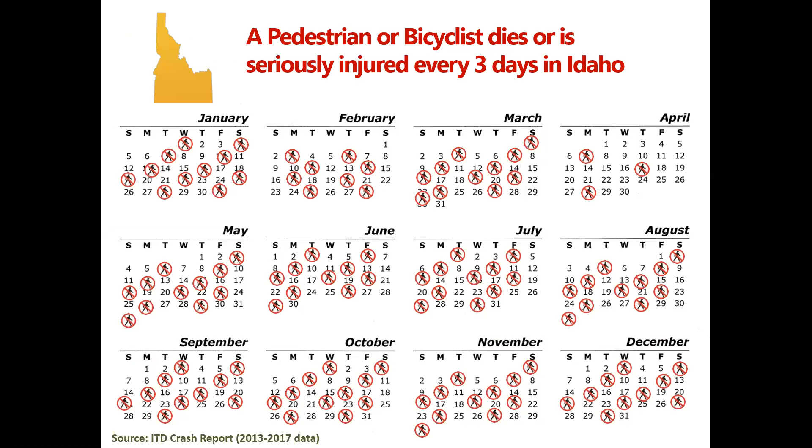So we have to really rethink what we're doing. In Idaho, this is seen in our crash data, where a pedestrian or bicyclist is seriously injured or killed every 3 days. And this number is going the wrong way—this used to be every 5 days. So we're starting to see a lot of issues with this.

The public operation of that vehicle is a privilege. The public operation of those kids is a right. Our roads and traffic signals undergo very detailed design elements and signal timing for the exclusive comfort of that vehicle. Yet many of our roads are purposely designed to limit the freedom of mobility of those children.

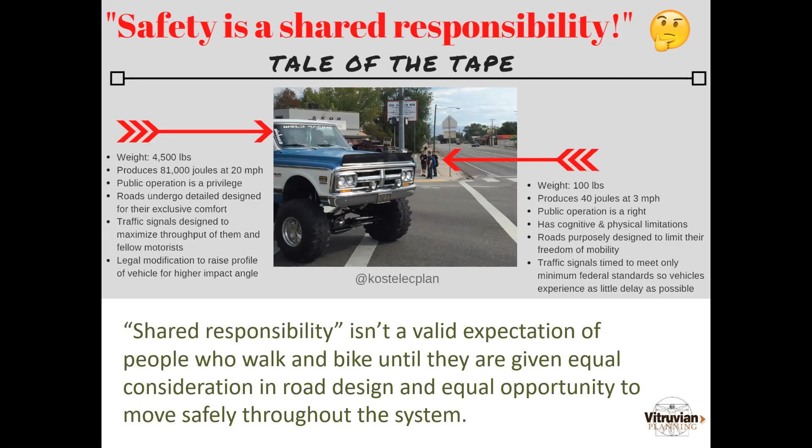So when I hear shared responsibility, I say that's not a valid expectation of people who walk and bike until they are given equal consideration in road design and equal opportunity to move safely throughout the system. That's when we can share it.

We often hear things like 'make eye contact.' If you've ever tried to actually do that with the A-pillars on a vehicle, with the tinting, with window glare, and then vehicles of this size, you'll realize that's not a fair expectation to give a child at an unmarked, unsignalized crossing where they might be walking to school. Speed is also an issue—we've seen traffic deaths go up during COVID because essentially it's revealed how our roads are designed to induce speed.

And we start talking about the limitations on a human body, especially a child. The research is really telling us that that 10-mile-an-hour difference is really 7 times more likely to kill a child. So this is why these components are important, and that's what we're going to give you today.

But I think we need to first bust some myths that I've seen over my career that limit our ability to put engineering countermeasures into the system. And I'm going to bust those shortly. I do a whole hour-long presentation called Everything Your Traffic Safety Office Told You Is Wrong to help bust down these things so we can make streets safer.

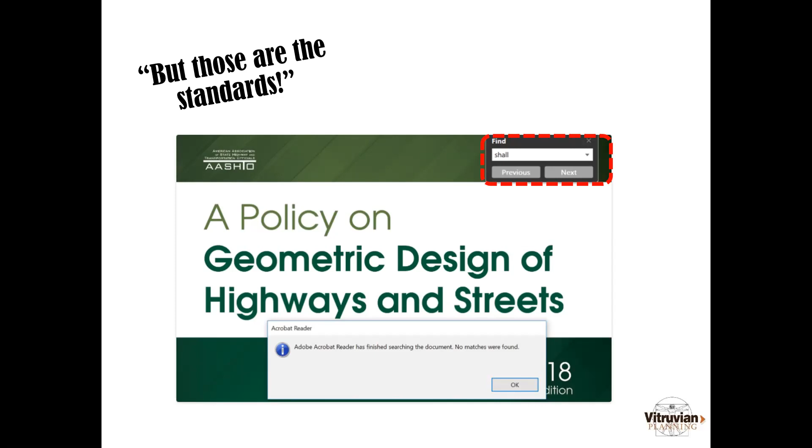Oftentimes, it's our cities, our highway districts, or our state DOTs that adopt standards. The Green Book itself has a lot of flexibility in it that should be incorporated into our local standards if we go back and revisit them. AASHTO even publishes its own flexibility guide to say how flexible they are in the design.

The Green Book is not intended and never was intended to be used solely as the standard upon which to base the design of every highway, and there's sufficient flexibility permitted to encourage independent designs.

But they also say in this book, and the case law backs it up, a standard doesn't make something safe. A standard will generally shield you from liability. However, deviating even from a local standard, like Idaho standards for public works construction, needs to be documented. And agencies don't get in trouble legally for not following a standard. They get in trouble legally when it's not followed and they don't document the reasons why.

And so if you have a licensed engineer and they have that license, the judgment and the project tracking is generally seen as more important because they realize not a single document or book can account for every situation in which we're trying to make decisions.

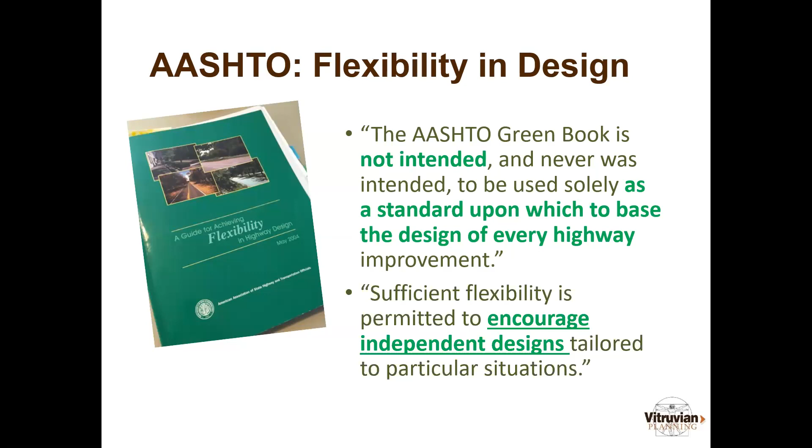The other manual out there, the Manual on Uniform Traffic Control Devices, in some contrast to AASHTO, does have things that say shall and does have standards, but they even say up front that the MUTCD should not be considered a substitute for engineering judgment. And again, it's about a specific situation.

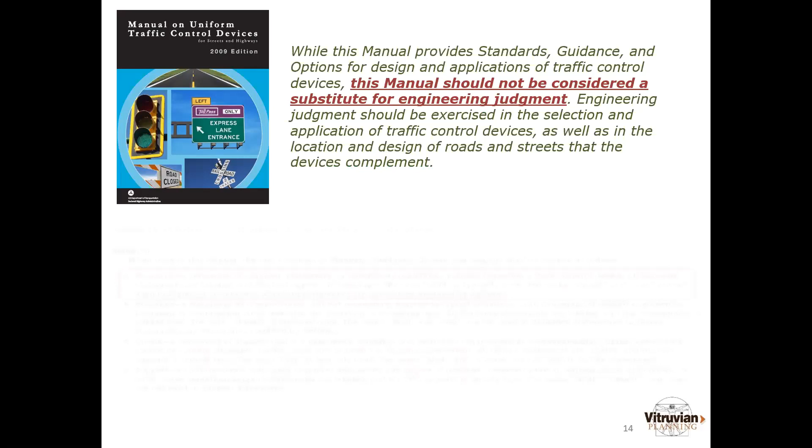If you go deep into that document, which is about another 1,000 pages, and they're updating it this year, there's a breakdown. Things that are standards will use the word shall and will be put in bold text. And chapter 7 of this covers school zones, and there are other pedestrian and bicyclist elements. Much of this document is actually something other than a standard.

A vast majority of the content are these guidance options and support. So if you were to thumb through MUTCD and hear somebody always call it a standard, very few, maybe 20% of the things in there are a standard. The other piece with MUTCD to understand is it oftentimes doesn't require something to happen. It means if you make the decision to install a sign, a pavement marking, a traffic control device, you then have to comply with the book.

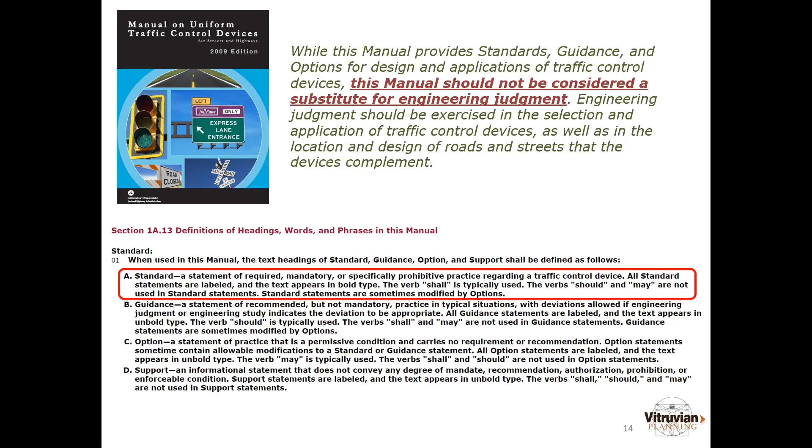Level of service must be preserved. We can't allow the kids to cross, that'll delay vehicles, and that's against federal policy. Not true. Level of service for motorists is 100% a comfort measure, it is not a safety measure. This has been stated and validated by the Federal Highway Administration, but it gets interpreted as this sacred doctrine too many times. Cars have to go fast, that's what the policy says.

AASHTO says failure to achieve a level of service indicated in the Green Book does not constitute a non-standard design decision, and FHWA has clarified it's not a mandate. The funny part about it is the moment we realize it's not required, we can then also realize that Federal Highway Administration has published guidance on level of service for pedestrians. And many of our traffic highway capacity manual softwares have pedestrian and bicyclist level of service modules in them, and we should be using those as a trade-off and understanding when we evaluate new developments, corridor studies, and intersections.

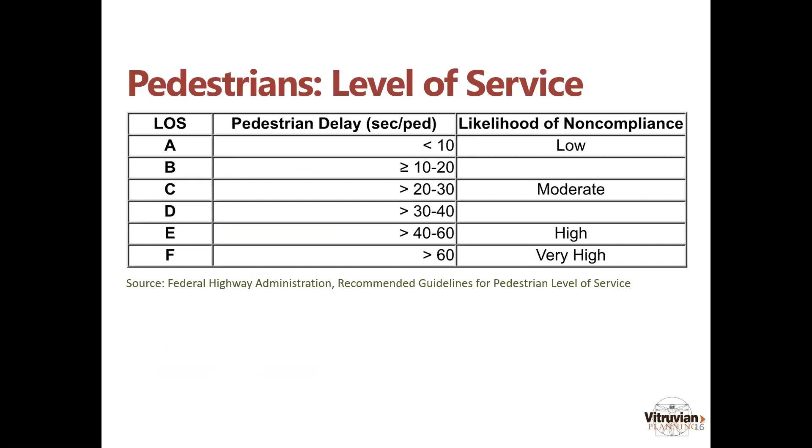What FHWA says is when a pedestrian starts to experience more than 40 seconds of delay at a signalized intersection, their likelihood of non-compliance is high or very high. That's that classic, sometimes misunderstood jaywalking. I'm going to cross against the signal if I think it's clear, if you make me wait more than 40 or 60 seconds for that. And we need to consider those things in this realm.

Lane widths are another one. If you're a local city and you have local residential streets that still have 12-foot lane widths as a requirement, you've got lane widths that are as wide as some interstate highways. And we know those kind of factors with other street design elements help prompt speed. This is a great point to show how AASHTO isn't a standard, because 12-foot lanes are not a standard unless your local agency adopts them.

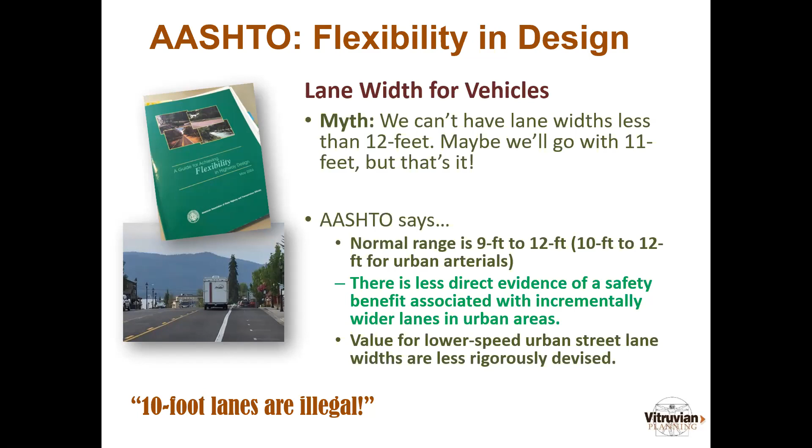The AASHTO Green Book has 9 to 12-foot lanes for local and collector streets and 10 to 12-foot lanes for urban arterials. And they explicitly say there is less direct evidence of a safety benefit associated with incrementally wider lanes in urban areas, and the values for lower speed urban street lane widths are less rigorously devised. This is because AASHTO is a national organization of state DOTs. They're looking at state highways, and I love the photo on the bottom left because that is a 10-foot travel lane in McCall, Idaho on a state highway, and it gets a lot of truck, recreational, and boat traffic there. So we do have flexibility to do these kind of things.

Last myth before we move into the treatments: 94% of crashes are caused by human error. I call this the golden calf of traffic safety, and I've heard it unfortunately used a lot over my time to deny a safety countermeasure. Well, if the pedestrians were just perfect, or if the motorists were just perfect, our standard following design practice wouldn't be a problem. Well, that's not what the data says.

This stat is oftentimes misquoted from the National Highway Traffic Safety Administration's crash causation study, where they looked at the critical pre-crash event and found that the last failure in the causal chaining of events leading up to a crash was related to driver error. But the causal chain of events represents many, many things, including the road conditions and the road design that's out there.

So moving into the main topic today, as we set that standard, I'm going to do this from a menu perspective. I'm going to give you the appetizers first, some of the basics, and then we're going to move into the entrees when we look at signals. And I've just called this one dessert, other great things you can incorporate into this environment. And if we put these things all together, we kind of get that wholesome meal that we are looking for.

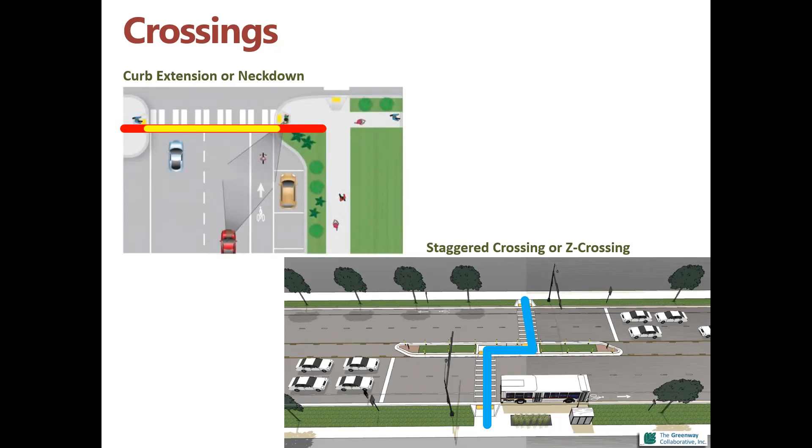The one thing I would avoid with this at signalized intersections is if we have a median, we need to not force the pedestrian to wait there for an extra two or three minutes. I can show you one on US 95 in North Idaho that is downright terrifying to stand in that median. We need to give people time to cross in one phase.

Here's some different curb extensions. I've tried to use photos from around Idaho for context, so maybe if you see a place you're familiar with, it can give you what they've experienced. Chubbuck, Idaho has retrofitted some classic 1960s-70s style roadways with these curb extensions. They help make the turning radius tighter for motorists, and have all those other benefits for pedestrians.

The other three examples also allow us to treat the drainage flows that existed prior to the curb extension. Oftentimes we'll hear that drainage issues, which are valid, can be used to basically prohibit curb extensions. But I wanted to show you that there are other options.

This 27th Street one in Boise has an added feature, and you can kind of see the tire marks on it. It's built like an apron of a roundabout, so it can be mountable for the lower percentage of truck traffic that's there, but forces the vast majority of regular vehicle traffic to take that turn a lot slower, and has some of the same benefits for pedestrians as others.

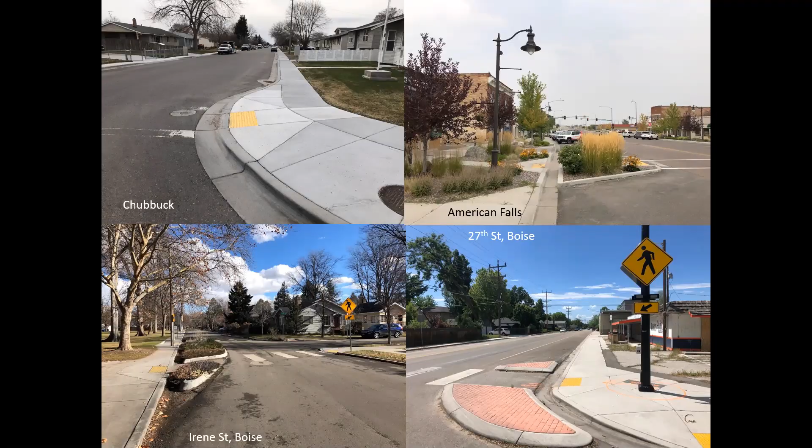Snow, we hear this a lot. Oftentimes the issues with snow plows and curb extensions don't have to do with the fact that they're a curb extension. It has to do with the design of the curb extension.

If you want some great input on this, the Public Works folks up in Ketchum and Hailey have this down to a science. Here are some treatments to deal with that. Top left is Bozeman, Montana. Bottom left is McCall, Idaho, where they put reflective tubular markers around the outer edge of the curb extension so plow drivers can see them. It's also important to avoid abrupt edges in this environment, because that's where you can get the plow clipping off and damaging the curb.

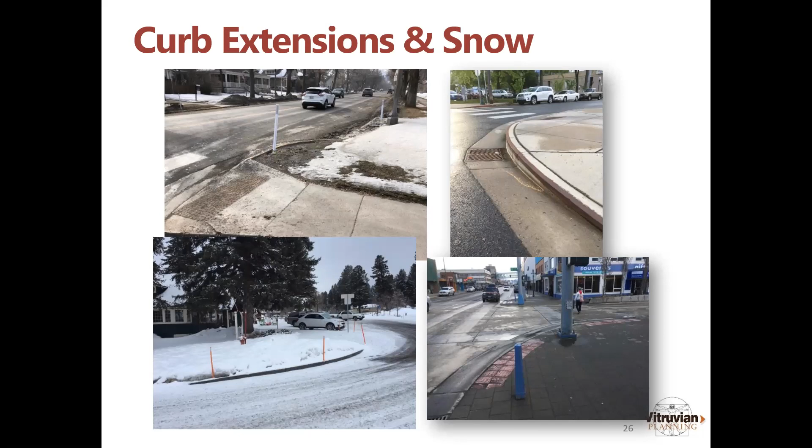Top right is Sandpoint, where they've put an L-shaped protector in cast iron on top of their curbs at curb extensions to save them from chipping. And if you want to doubt me on the snow stuff, bottom right is Anchorage, Alaska, where curb extensions are all over. What they've done there is a smoother transition, so you don't get those abrupt edges. There are techniques out there to deal with this effectively.

Pedestrian crossing islands, median islands. Top left is here in Boise, the classic Z crossing you'd see. You can see how if you cross from right to left, you're turning and facing traffic to make the next maneuver. Top right is a more traditional one at a mid-block crossing, from the Walla Walla area, giving pedestrians a refuge with the rapid flashing beacon, which I'll cover.

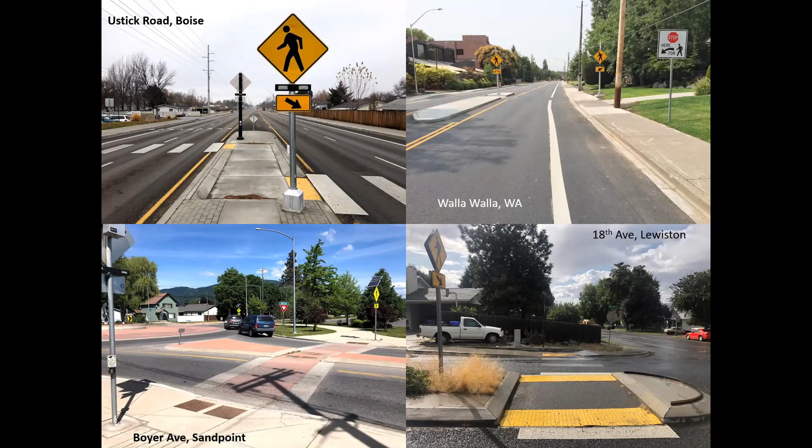The bottom left one up in Sandpoint are what you'll commonly see at a roundabout, and this one also has rapid flash beacons on the entry. Then there's the 18th Avenue project in Lewiston, which if you haven't seen it, has some neighborhood traffic circles, rapid flash beacons, and pedestrian refuge islands. It's a pretty comprehensive project, especially for a city of that size.

Moving on to treatments, this is where I'll really cover signal aspects, because this is what we get asked about a lot. It's one of the things, especially for a full traffic signal, that has limitations within what's written in MUTCD to justify the signal. So I'll start with the traditional signal, but I won't belabor it too much.

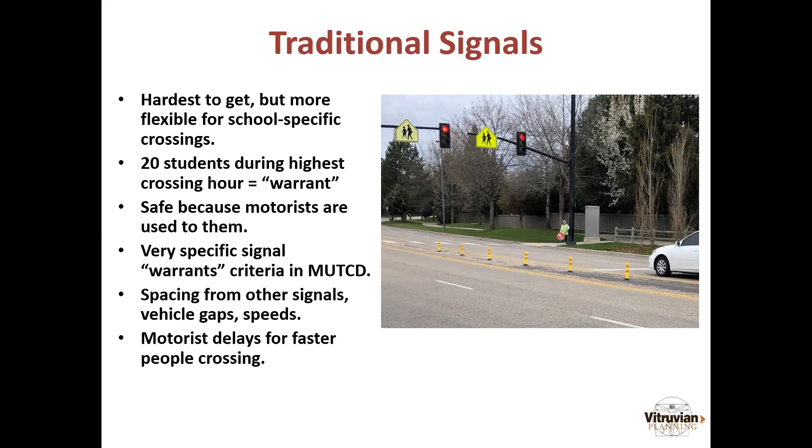Some of that is why flexibility emerged about a decade ago for other treatments, like the rectangular rapid flashing beacon. It's essentially a crosswalk accent device — you'll see flashing yellow lights when a pedestrian pushes the button, there for increased visibility or conspicuity to allow the crossing. The flashing lights are set at a frequency we've become used to seeing with emergency service vehicles, which is part of the theory behind the driver yield behavior rate of 73 to 96%. It reduces crashes, and the cost for a pair is in the $20,000 or so range.

You can get these with solar panels and other things. And obviously, if you're rebuilding curb ramps and things like that, those costs can go up quite a bit.

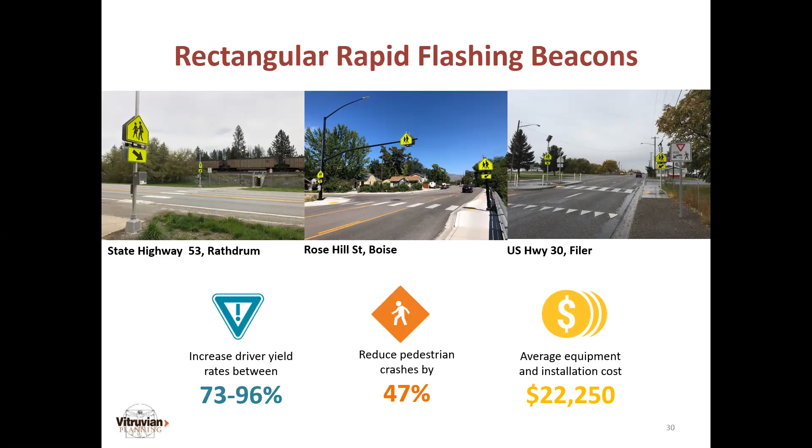The other 2 are on ITD roads, one in Rathdrum. The one in Filer is a 5-lane road connecting to their middle school that I would say is probably a borderline application for this type of treatment on a road like that, but they do have the Z crossing and other features in there. The top left is from a firm, Carmanah Traffic, which was great in buying the patent for the RRFB and releasing it for public use.

Here's just some other examples. You can see this one on Curling in Boise is used with a curb extension design that puts the medians or islands out there and reduces that crossing exposure.

This one in Moscow is great in a lot of ways. They even put a short median in there, mainly to help narrow the field of vision for motorists as they come through and really help slow that traffic down to the desirable speed in a school zone.

You can also see in this one, the width of it is 10 feet. Usually that conforms if you're doing a shared use pathway or a pathway connecting to a school - we shouldn't be defaulting to the 4 or 5 foot curb ramp for pedestrians. We should be building one that's the width of the path.

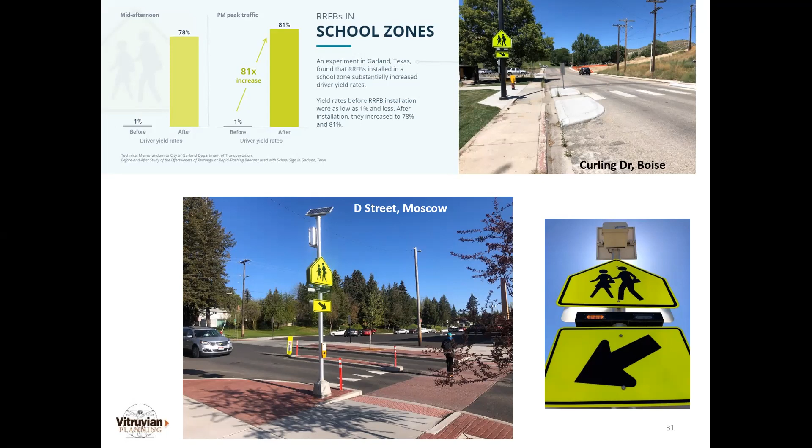When to use them: generally 3 lanes or less, put a median or a Z crossing if greater. We generally want these on lower speed facilities, 35 miles an hour or less. I would say if you're at that 35, you really need to be checking what's occurring.

The flashing time should be set to the MUTCD times for people crossing. It's 3.5 feet per second, but you can slow that down, especially for school zones or a senior center or something like that. You can't put these in at places already controlled by a stop sign or a traffic signal. That might be a request you've gotten from parents - to put this in at a 4-way stop. These are really meant for other types of uncontrolled intersections.

Some other places you see these are some of the slip lanes and on-ramps to our interstates. We have one in Boise here at a couple of right turn slip lanes at Myrtle and Broadway, as well as at Beacon and Park Center. So it's to raise that visibility.

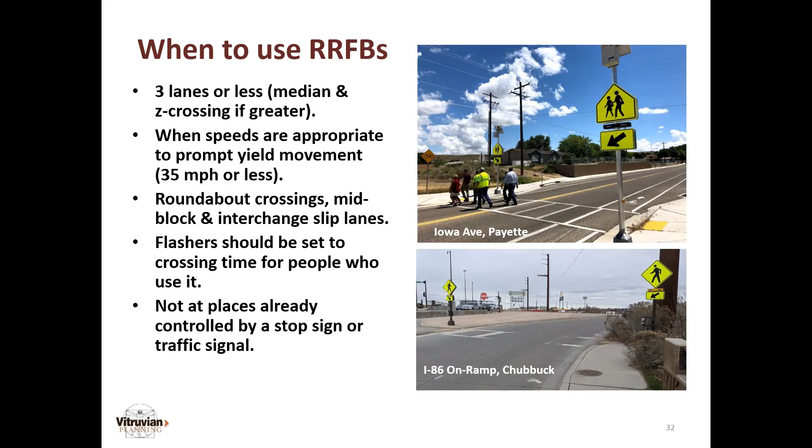Don't pay attention to the maintenance in the one in the bottom right - those are some things we really need to address from an access and usability standpoint in a lot of different ways. Don't do this. I always say if I can get a great panorama of the mountains and barely capture both rapid flash beacons, we probably shouldn't be doing this treatment alone. The signs tend to be out of the field of vision of the drivers.

This is near Preston school complexes, and asking kids to cross this is really not the greatest thing. We do have some room on the side with the shoulder to do a curb extension, and we might have room in the middle to do some type of median treatment depending on the characteristics of the turning vehicles at that intersection.

In a more urban setting, again, we shouldn't be doing this and expecting kids to cross a 5-lane road with a flashing light way off to the side, on a road that's probably designed for 50 miles an hour or so instead of whatever the posted speed might be.

This is where we really need to think about going into that next treatment, and that being a pedestrian hybrid beacon, or what I say is the artist formerly known as a HAWK signal. These are a step up in a lot of different ways.

These are the ones you've seen - if you've seen one, as I push the button for a pedestrian to cross, sometimes the signal starts flashing yellow immediately. That's a signal for motorists to start slowing down and start watching. The moment I get the walk signal is when the 2 balls or lights on top go red, and they are solid red for the walk signal duration, and they start flashing red when the countdown begins.

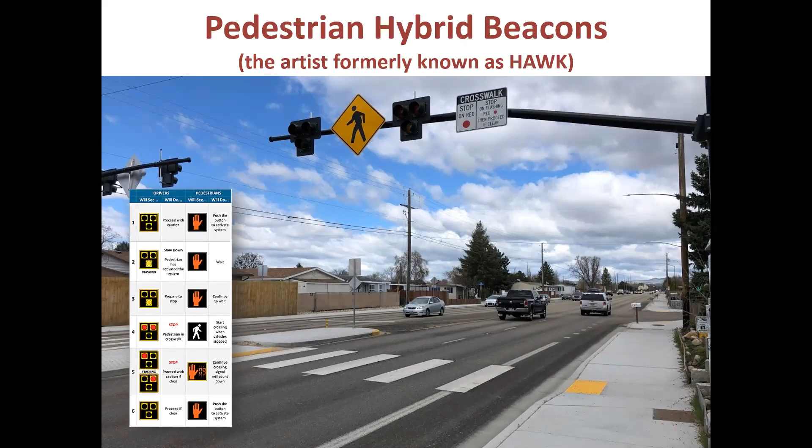I would say for this treatment, sometimes the first 1 or 2 in a community is a little bit harder because it's brand new, so it needs to come with education and outreach. But I think as we've seen here in the Boise region, where we probably have a per capita installation of these more than any other urbanized area in the country, we're starting to get to that point where the drivers are trained. Is it perfect? No, but the compliance seems to be pretty good.

And the studies flesh this out a little bit. Yield rates are high, crash rates are reduced. These, however, can come with much greater cost, and part of that is because of the signal equipment and the mast arms needed compared to the rapid flash beacon.

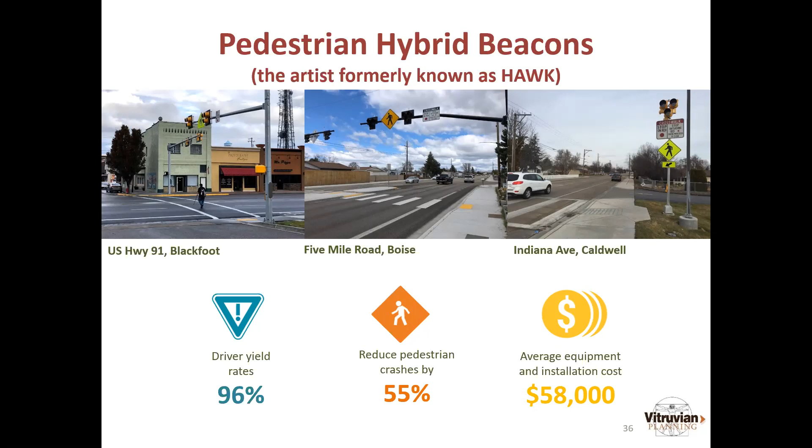Again, on this one, I would watch that flasher being outside the field of vision. In a school zone, these are generally coupled with some sort of other school zone advanced warning and speed limit reduction, and kind of our quintessential walk to school route in Idaho picture that we have going on right there.

Another example, this is the one in Blackfoot. You can see the advanced warning for the crossing, but you also see a curb extension ahead at that corner there. So these done in combination with other features just help to heighten what's going on and the issues there.

So when to use them? Generally, more lanes, more speed is where they tend to be more advantageous. One of the things MUTCD does is it allows these at a lower threshold from a pedestrian volume standpoint, and you have greater flexibility to feel like you can make that engineering judgment versus a full traffic signal.

It's best when motorists come to a complete stop. So if you're on the fence between a rapid flash beacon and one of these in a school zone, it's best to make the motorist come to a complete stop. The lowest pedestrian volume threshold here is around 20, but again, using that engineering judgment, you can look at things and just be careful with it.

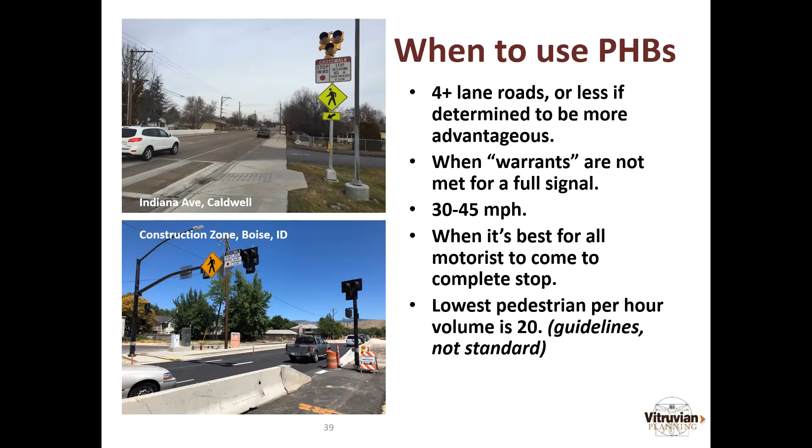The bottom left one is in a construction zone, and this was an application done to help route people around it. This was going to be a place where a hybrid beacon was going to be installed post-construction, so they got half of it in where it's supposed to be, but a pretty good tool to use when you're trying to route people around these and maybe do it in advance of an intersection.

Don't do this, and I'll give you a backstory here. This was a full signal on Cloverdale Road here in Boise that was there before the road was widened for kids to cross. And it was converted from a full signal to a pedestrian hybrid beacon, combined with the speed limit being raised from 35 to 40.

And the result is this just isn't working. The crossing guards have quit their jobs and they're busing kids from across the street that had formerly walked. So we need to be careful in transitions and thinking about these things, and hopefully a lesson learned here. I don't know that those results would have been fully expected from the beginning.

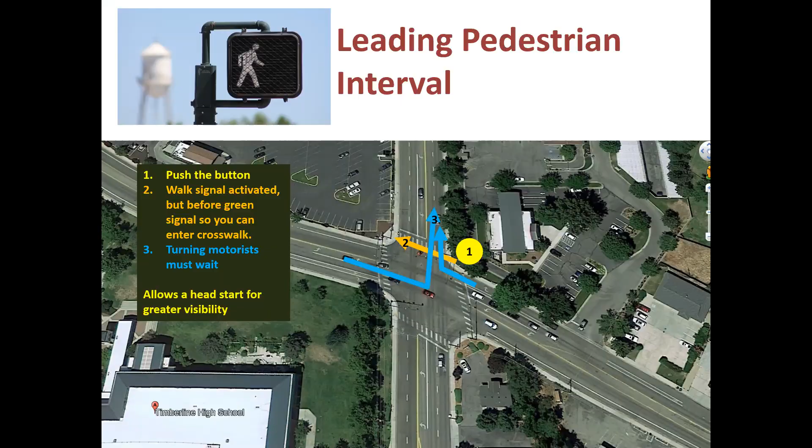Flashing yellow arrows: these are becoming more prominent and can be very problematic for pedestrians. The good part is we now have ways and methods to help preempt them when the button is pushed.

This is at Milwaukee and Northview in Boise. Prior to some recent changes, this one basically—the flashing yellow arrow setup allows us to not even give the flashing yellow phase during school walk time. So if you don't have that out there today and you have these signals, you should be doing that.

Another factor that allows this, as you can see, the red arrow is showing on this one because the push button was pushed and the walk signal is there. So in those phases where a pedestrian pushes the button, you can preempt that flashing yellow arrow phase. In some cases, maybe you only have that during a peak hour. If it's schools, you might want that to preempt it for the entire school hours and have it preempted by push buttons the rest of the day.

Other things: speed limit setting, and this is one that's getting a little more prominence. We've often heard that the 85th percentile rule is the only way to set speed limits, and the Federal Highway Administration has endorsed others. There's a lot of recognition that drivers really vote with their feet in setting speed limits. While that might be most applicable on an interstate, we're finding that the research into this doesn't apply to local streets and wasn't considering pedestrians and bicyclists. The Federal Highway Administration has endorsed the use of another tool called USLIMITS2, which is a slightly different methodology and inputs, but talks about using the 50th percentile to set speed limits when pedestrian safety is expressly a goal.

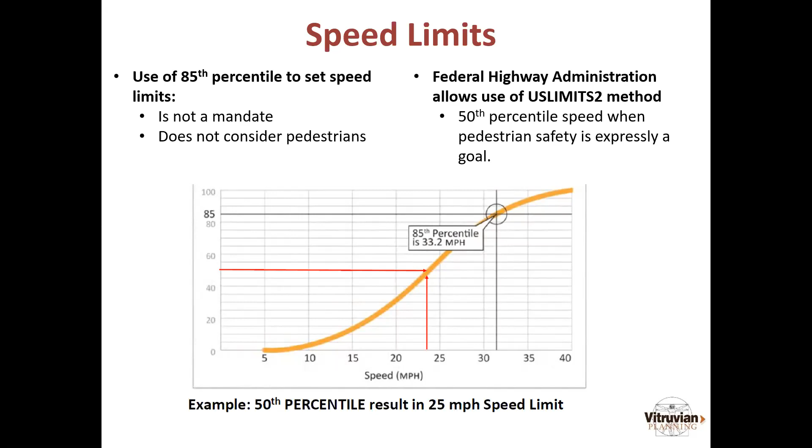So if you have school zones or activity areas where there's pedestrian activity outside of school hours—I know a couple of our high schools have activity for a 12 or 14-hour shift, not just in those arrival and departure times—you do have the flexibility to put it through this analysis and have a reasoned judgment to make that call. Why does this matter? If you've been involved in pedestrian safety, you've probably all seen the thing about speed and risk in terms of vulnerability to the human body.

The other thing that speed does is it changes the peripheral vision of the motorist. When you're going faster, your focus is much further down the road, versus when you're going slower at 20, you're looking closer. Next time you're on one of our 80-mile-an-hour interstates, think about the point down the road that you're fixated upon.

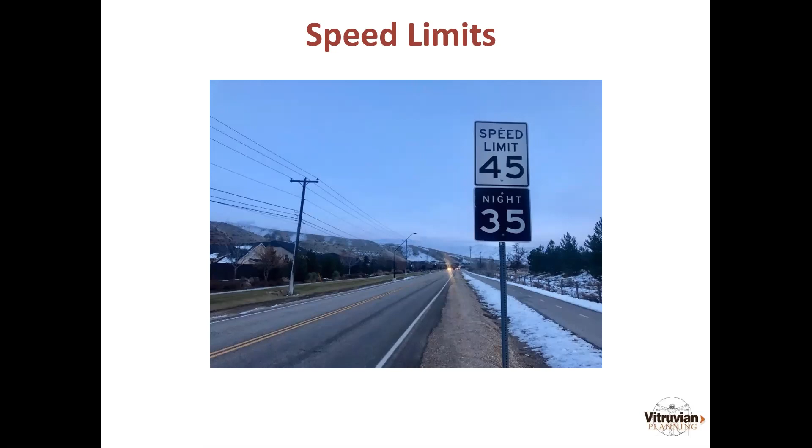The last thing on speed limits, and we'll stand for some questions, is what if we were to think about alternative speed limits? We do that a lot in school zones, but we also need to get the corresponding design expectations. What if we did nighttime speed limits in our downtown areas or areas of high pedestrian concentration? The city of Tucson, Arizona is starting to look at things like this, based on the premise, well, we reduce speed limits for wildlife. That's obviously to protect the motorist as well as the wildlife, but it's something we can probably think about doing for pedestrians. So that's kind of the quick run through of a lot of these.

The last piece I'm going to cover is this lighter, faster, cheaper approach, or what we call tactical urbanism. If you've got some of these ideas, find a way to test them out first. We don't want to build a curb extension that feels too punitive to a snowplow, but we shouldn't let that idea go away. On Sherman Avenue in Coeur d'Alene, they've put in temporary curb extensions to reduce the speed limit and test out what's going on, doing pre and post studies and looking at turning radius.

The bottom left is essentially taking yellow 4x4 posts and some movable, flexible bollards and tubular markers to create a curb extension. You can see in the background they have a fire truck and people assessing it, because they want to identify the geometry that works while still having those benefits.

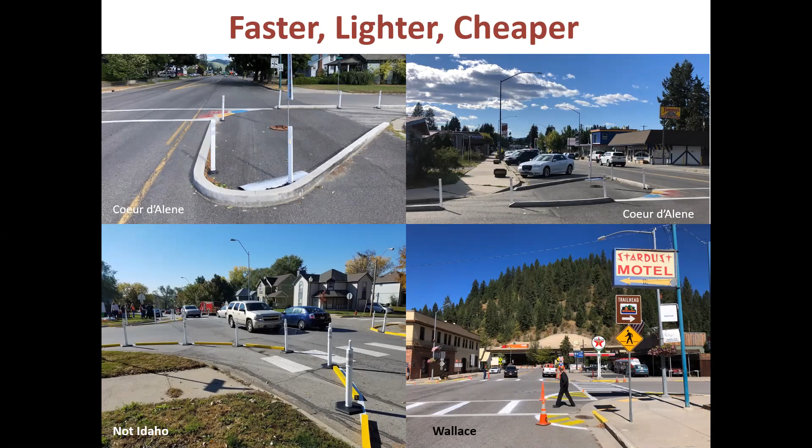The bottom right is one we worked on in Wallace, Idaho last year on a couple of their main routes coming into town, just painting and marking them to mimic high visibility crosswalks, then taking the city council on a walk to look at them. We also did one in American Falls with similar results. North Dakota DOT, I bring this up because it's not some wild, kooky place like Washington State or California doing this. North Dakota is doing this through their DOT in their small towns and cities across the state. So it's something in trying this out that should not be limited to urban areas or big city places. We've got some great examples, and I hope you saw some of those in the images.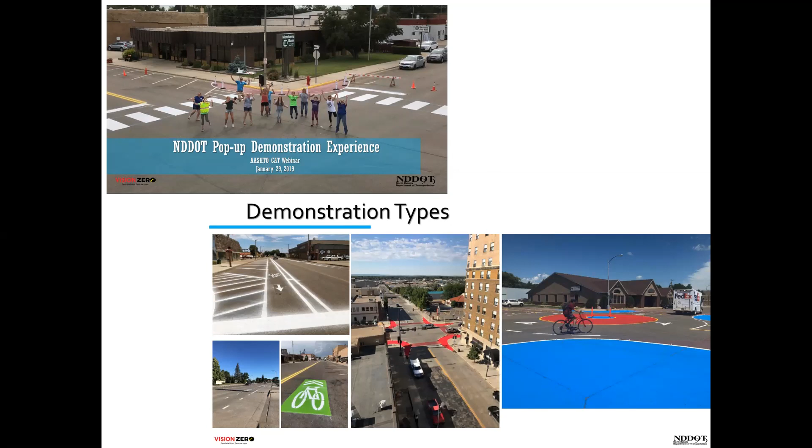One question is, what considerations can you give to bicyclists when providing the neck down mountable apron treatment at crossings? It seems that neck down portion would take over a bike lane. Yeah, your curb extension should not go into the bike lanes, and you should not be counting the gutter of the curb extension as a bike lane. So that's one piece, don't do that. The other thing you can do for conspicuity's sake is put a reflective post or something out there, and we've got some good examples of that. But yes, do not build it out into the bike lane.

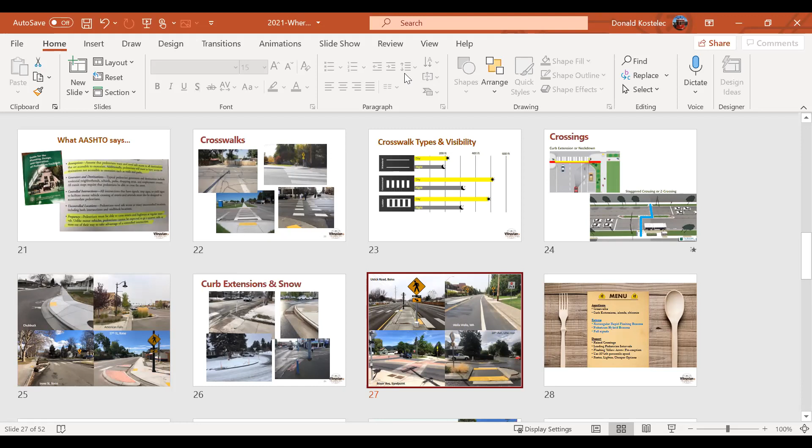Let me go back to this slide, see if it switches. I don't have an image in here, I should have put one. In places like Bozeman, Montana and Portland, Maine, on these high visibility crosswalks, they're doing a light etching out of the asphalt and then placing the thermoplastic or paint in that, which also causes them to last longer since plows don't pick them off. Another treatment, which I think ACHD tends to do here, is to space the markings in the crosswalks to miss the wheel tracks of vehicles, because once they hit those tracks they start to wear off - you can almost see in the bottom right the two wheel tracks between the markings. So if you're looking at the general sphere, there are ways to reduce wear and get the wider crosswalks.

The bigger concern I see, from both a width and application standpoint, is the top left. These start to look the same as the stop bars at an intersection, versus a stop bar in advance of a crosswalk, which looks very different in a high visibility setting - you can see that in the bottom left there. So I hope that helps.

I see examples of crosswalks, for example in Boise, that overcompensate around the curb and just have more - the area of the markings is greater, the width of the crosswalk is greater. I assume the car sees the crosswalk sooner than with a 6-foot crosswalk width. But I'm not finding many, and I see opportunities to do that at crosswalks in the Wood River Valley where there is crash data and where kids have been hit on their bikes. In terms of bringing that topic to local municipalities who might not want to spend the extra money - I hear your ways of lowering maintenance costs with the edging and with aligning the continental or zebra stripes, whether in the continental design or a ladder, but optimally maybe the continental design so they're not worn down - as someone from Safe Routes coming to local municipalities and saying, would you consider widening this crosswalk? They ask why. Would you recommend that? What would you recommend I say?

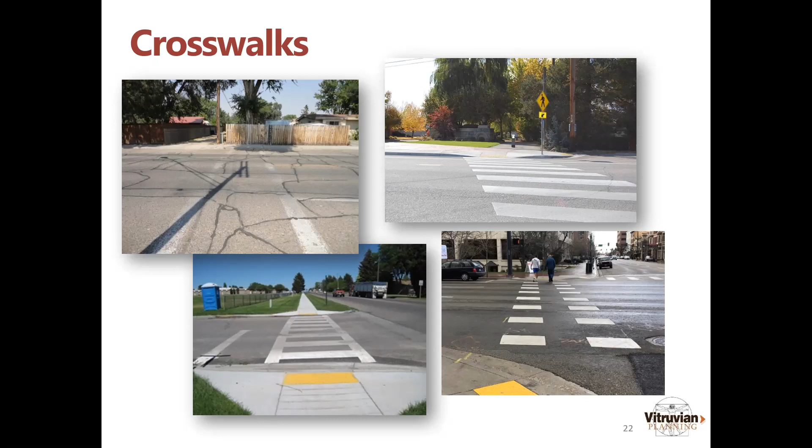Yeah, let me look and see. I don't recall seeing anything equivalent that looks at width type specifically. Maybe - I think I've got your email somewhere along the way - I can do some digging through the Pedestrian and Bicycle Information Center and see if there's anything on that. Maybe it's something that just hasn't been studied a ton. I'm not sure.

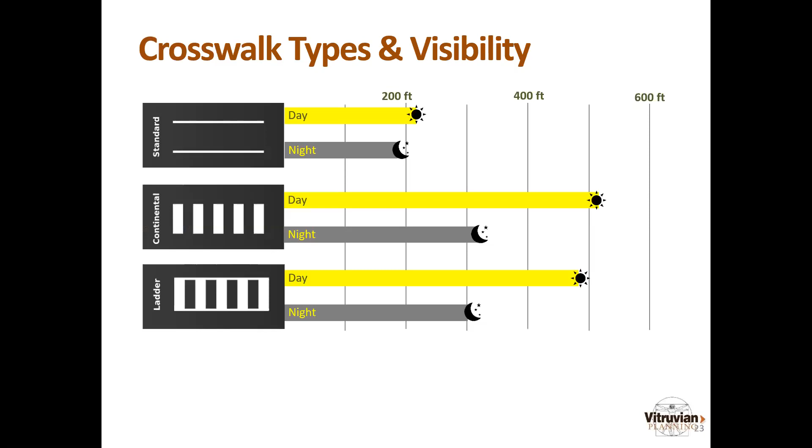So Don, what would be your recommendation for one of those designs you mentioned for a more rural road that's really narrow but has a higher speed, say 50 miles per hour? I'm sorry, can you restate the question? So the designs you mentioned in your presentation - what would you recommend for a rural road that's narrow but the speed limit is still say 50 miles per hour?

Yeah, I think in those situations you'd want to try to find some design cues that help narrow that field of vision. There's always the concern of bringing the speed zone down too rapidly, among other features. A lot of places I've seen will just throw a rapid flash beacon out there and not much else. I would really try to do some sort of design that mimics a curb extension on that part of the shoulder.

Maybe just a raised concrete curbing or something before and after, with some other considerations like overhead markers and some advanced warning flashers and other things. But you're really talking about a very difficult situation there, especially if we're talking about children crossing in that environment.

Thanks, Don. It looks like Lisa had a comment. Sorry, I would say if you have the ability for a center median or to widen it out a little to get something like that, that would be helpful. But I think in a speed and engineering discussion, you get into some other complexities at that speed. Yeah, it's like those rural roads can be pretty challenging, especially where there's still agriculture and you have the big ditches on the side. Lisa, if you want to unmute and kind of speak to that.